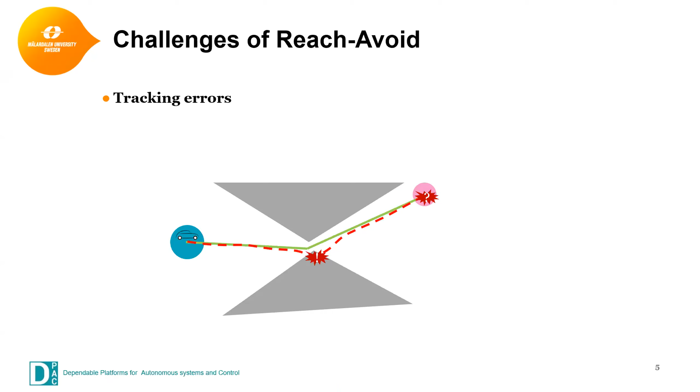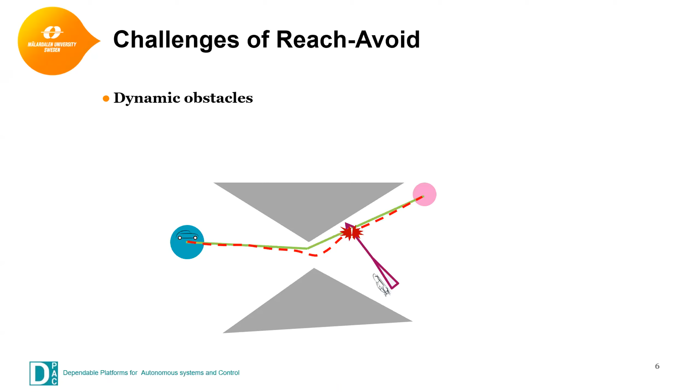But the truth is, the real trajectory, which is the dotted red line here, has some inevitable deviation from the reference path. So collision can happen, and also the real trajectory can end up in a position that is out of the goal area. And also in some other situations, there are some dynamic obstacles whose trajectories are overlapping with the trajectory of the autonomous vehicles. So collision can also happen in these situations.

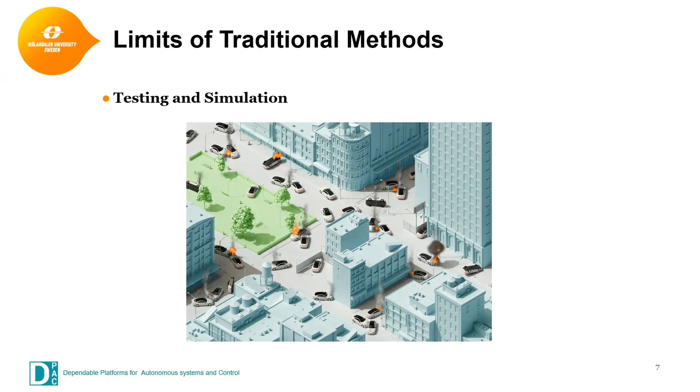And what about the traditional methods like testing and simulation? Well, accidents can actually happen at any moment, any place, from any angle in the environment. So there's no amount of testing and simulation that is able to enumerate all the scenarios. So what we want to do is to use formal methods to verify the reach-avoid requirement. And we'll use model checking, which traverses the state space of the model and checks if some propositions or temporal logic properties can be satisfied by the states.

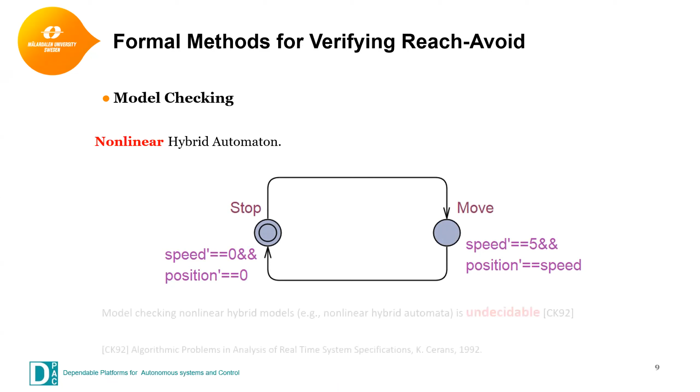Here I give you an example of a hybrid automaton of a car. It has 2 discrete locations, stop and move. It has 2 continuous variables, speed and position. And the derivative of position is another variable, speed. So this makes the model nonlinear. And model checking nonlinear hybrid models is undecidable. So what do we do? We want to transform the model that is undecidable by model checking to another model that is decidable by model checking.

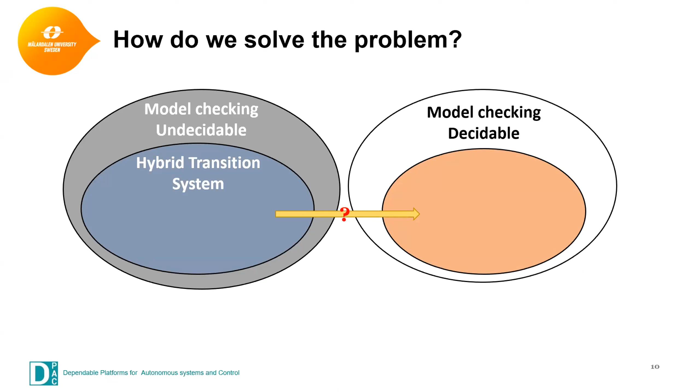And briefly speaking, we propose 2 theorems which transform the continuous trajectory, which contains the tracking errors, to a piecewise continuous trajectory, which is the reference trajectory. And then we further transform the model to a discrete time trajectory. And also we prove via these 2 theorems that the reach-avoid property of the continuous trajectory can be preserved by the discrete time trajectory.

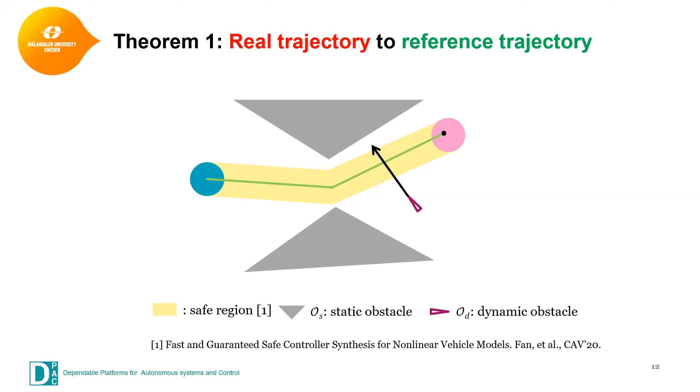And in our paper, we also include dynamic obstacles. So now we can actually get rid of the real trajectory, and only look at the reference trajectories. So if the safe region never overlaps with the static obstacles and the safe region of the dynamic obstacles, then the real trajectory is guaranteed to be safe. And similarly, it can reach the goal area.

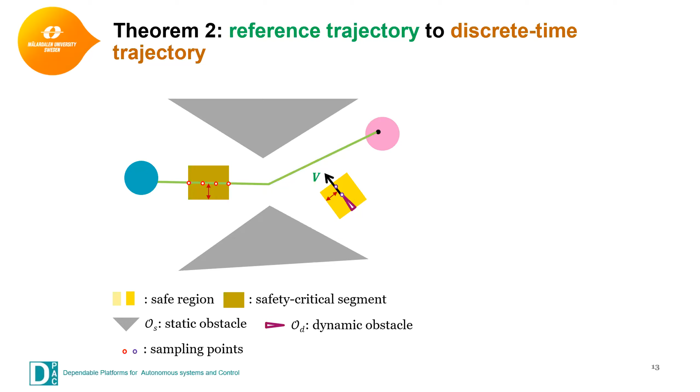Okay, even though the problem is simplified, still model checking the reference trajectory is undecidable. So we need to further transform the model to a discrete time trajectory here. What we prove in Theorem 2 is that if the sampling period epsilon on the reference trajectory is less or equal to s divided by the norm of v, and s here is the sum of the vehicle's tracking error boundary and the smallest tracking error boundary of the dynamic obstacles. And v is the maximum velocity of the dynamic obstacles.

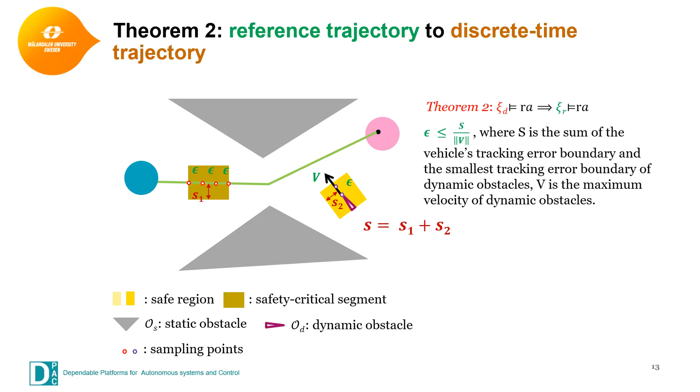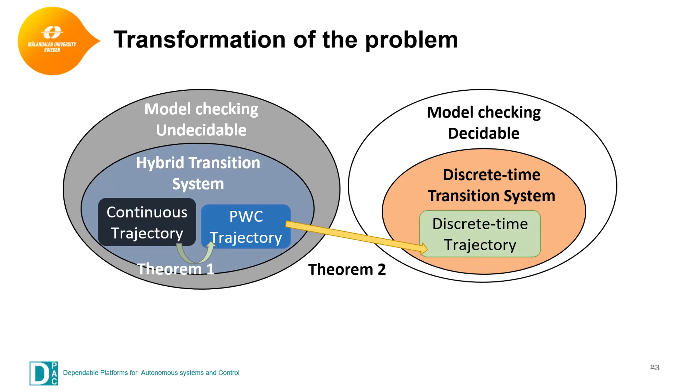So if epsilon can satisfy this condition, then Theorem 2 holds. It says that if the discrete time trajectory can satisfy the reach and avoid requirement, then the reference trajectory must also be able to satisfy the reach and avoid requirement. Okay, now I very briefly introduced the theorems. So if you want details, just check our paper or the complete version of the presentation. So now we transform the model from an undecidable problem to a decidable problem.

And now I'm going to introduce the model. We use timed automata in UPPAAL, UTA, to build the model of the discrete time trajectory. And this picture shows the UTA templates of the autonomous vehicles. Picture A is the vehicle controller, and picture B is the parameter UTA template. So if we instantiate the parameter UTA template, we can get the models that change the parameters of the vehicle, like their positions, their velocities, etc.

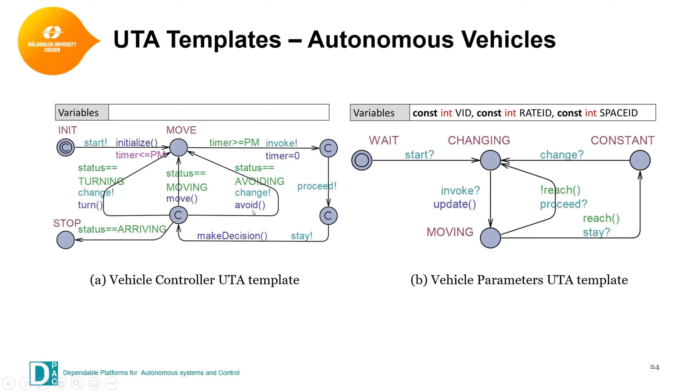And what we do in this model is that at the end of every PM time unit here, which is the sampling period, the controller UTA invokes the parameter models to change the values of the parameters. And then it makes a decision based on different scenarios. Maybe the vehicle needs to turn or go straight or avoid a dynamic obstacle by doing this function avoid. I will go into this function later.

And these two pictures show the UTA templates of the dynamic obstacles. Picture A is called obstacle initializer, which non-deterministically chooses the initial values of the parameters of the obstacle, like their position, speeds. And picture B models the movement of the obstacles. So basically it changes the position, speeds, and headings of the obstacle periodically, and also non-deterministically chooses the headings and accelerations periodically. So the obstacles can have the chance to change their direction and acceleration after a certain period.

So what we want to achieve by using these models is to create an environment where the dynamic obstacles can appear at any positions at any moment and travel at any speed to or from any angle within their capabilities. So if the vehicle model can actually satisfy the reach and avoid requirement in this kind of environment, then we say, okay, it can be safe and reach the destination under any circumstances.

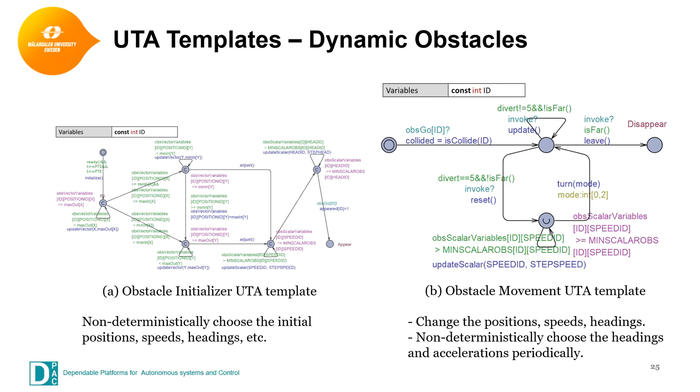What we do here is that if the controller UTA transfers via this edge and does this function avoid, the model checker calls the external library and also passes the information of the vehicle, the obstacle, the map to the external library to do the calculation. And then the library returns the target position or speeds for the vehicle to be able to avoid the dynamic obstacle in the next sampling period. So this is what we do.

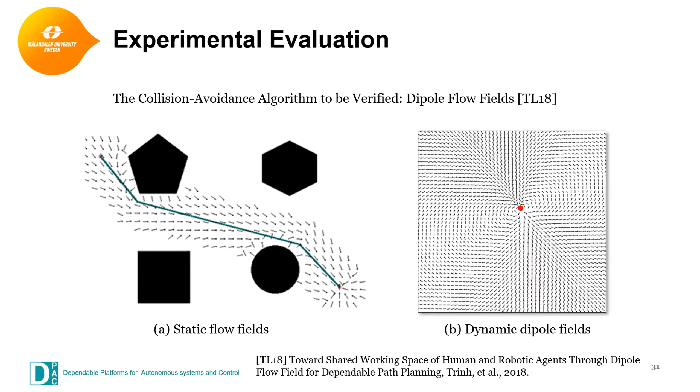And when the vehicle encounters some moving or dynamic obstacles, the algorithm treats them as two dynamic dipole fields. So you can imagine them as two magnets with opposite dipoles. So the closer they get to each other, the stronger the repulsive force can be, which pushes them away from each other. So now the problem is if the algorithm can be working correctly in the model or in the system. So we programmed the algorithm into an external library, ran the model, verified the model, and we got two

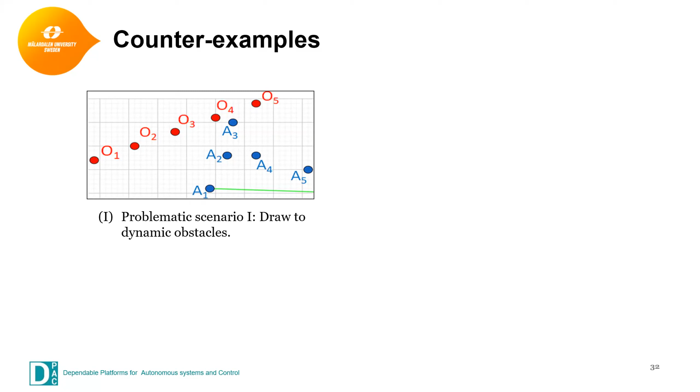problematic scenarios. In picture one, the red dots are the positions of the dynamic obstacles at different time points, and blue dots are the positions of the autonomous vehicle. So in this scenario, the vehicle is drawn to the dynamic obstacle instead of being pushed away. This is weird. And in the second scenario, the vehicle travels towards the dynamic obstacle.

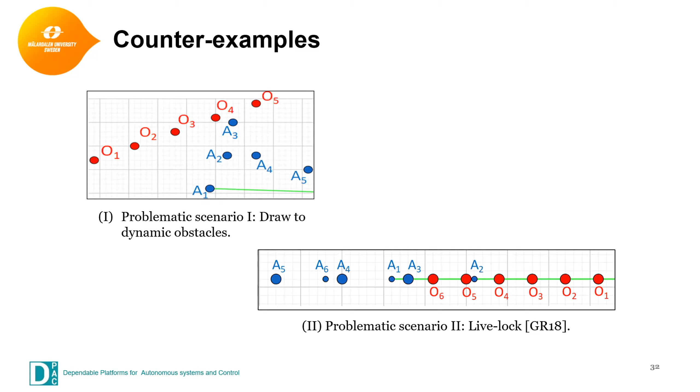So the attractive force attracts it to the goal station, to the destination. But when they get close to each other, the repulsive force just pushes them away. And this just happens forever. So we call it a livelock scenario. So based on these two counterexamples, we improved the algorithm and we did the verification again. And what we found is that in the

scenarios with only one dynamic obstacle, the algorithm can enable the vehicles to avoid the obstacles and also reach the destination. But if the environment has two dynamic obstacles, the collision is inevitable. But since we don't stop the vehicle even though a collision happens, the attractive force can still draw the vehicle to the destination eventually. And you can see the verification time is seconds or minutes, so it's reasonable.

Okay, in conclusion, we proposed tool-supported exhaustive model checking for the reach and avoid function of hybrid autonomous vehicles. And we proposed Theorem 1 and Theorem 2, which transform the undecidable reach and avoid verification of nonlinear vehicle models into a decidable approximation or a conservative transformation. And in our experiments, we show that our approach is able to find or demonstrate the absence of problematic scenarios or bugs in the model and system.

So for future work, we want to use statistical model checking on the cases where the dynamic obstacle and the vehicle are close, but collision doesn't necessarily happen. And also we want to explore more cases with more complex kinematic scenarios like robotic arms.